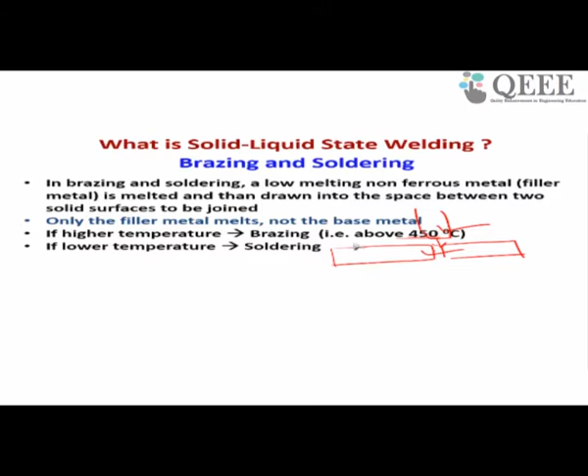So in solid liquid state welding, what happens? If you want to join two pieces together, you have to keep two base pieces together. Then you have to place a filler material near the two pieces to be joined. So here you have to place a filler material, and then you have to melt the filler material, and then it will move between this and make a joint.

So here base material, you are keeping as it is, you are not melting the base material, and you only have to melt the filler material, and after that it will go and deposit the weld. So you will get a joint. If the temperature is higher, it is called brazing, meaning if the processing temperature is above 450 degrees centigrade, it is brazing. If the processing temperature is below 450 degrees centigrade, it is soldering.

It means whatever filler materials you are going to use for brazing, it should have a melting point above 450 degrees centigrade, and solder filler material should have a melting point of less than 450 degrees centigrade. This is the only difference between brazing and soldering. Otherwise, the working principle of brazing and soldering are exactly the same.

As you know, soldering has wide applications. Soldering is used extensively in electronic assemblies, where the joints provide sufficient strength while allowing the various components to transmit electronic signals. So how does joining happen in brazing and soldering?

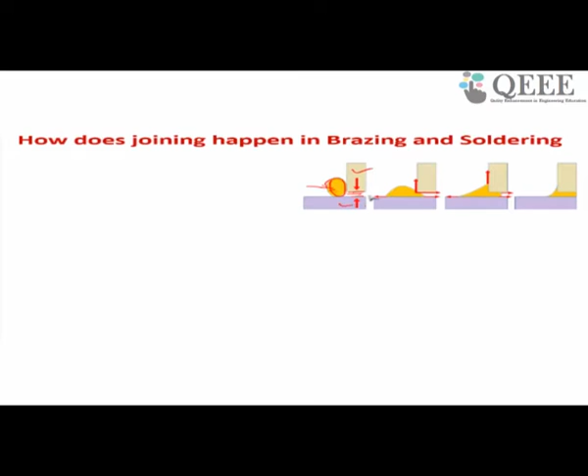So what are the conditions necessary for successful brazing and soldering? The first condition is you have to melt the filler material. You should have a provision to melt the filler material. This is the first condition.

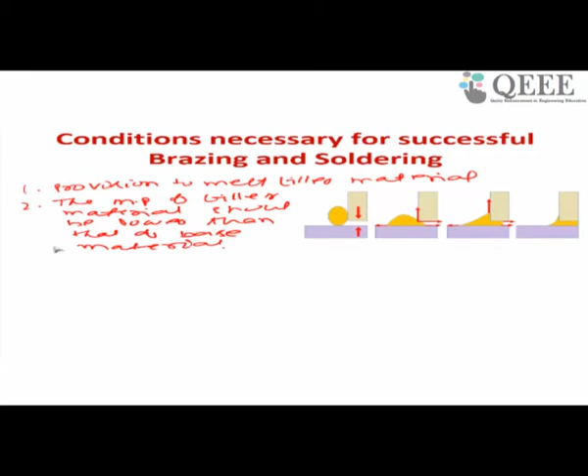Second condition is the melting point of filler material should be lower than that of base material. Then only the filler material will be melted and the base material will remain as is.

Without that, what will happen? So what are the conditions required? One is provision to melt the filler material. Then the melting point of filler material should be lower than the base material. If both conditions are there, then what else is required?

The filler material should wet the parent material. So filler material should wet the parent material. Then it should spread and make contact with the joint opening. So the filler material should spread, wet the parent material, and spread.

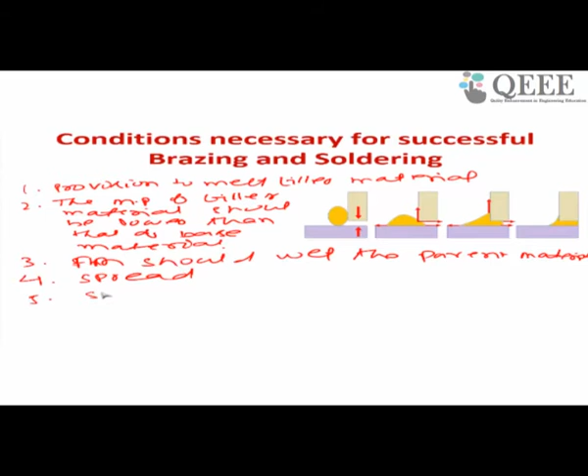Then you should have a provision for capillary action. So points 3, 4 and 5 are important. What is the basic requirement? The prime requirement is the filler material should wet the base material.

Suppose this one and this one you want to join, the filler material should wet, so it should have high wettability. Then point 4 says after wetting it should also spread continuously. When you place water on it, it spreads continuously, then only it will wet. However, when you place mercury on a solid surface, it will not wet completely.

So water has good wettability compared to mercury. So for capillary action, point 3 is satisfied - filler material should wet the parent material, and for that it should have high wettability. The next point is it should spread continuously and completely. For that, what is the necessary requirement? The contact angle should be as low as possible.

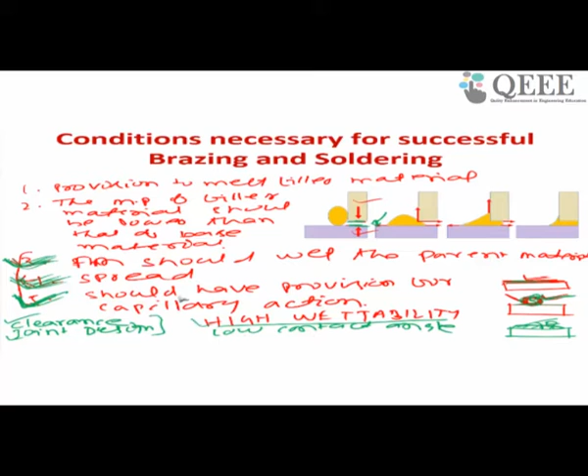So we discussed that to satisfy points 3 and 4, we should have high wettability - wettability is a parameter, wetting is a parameter, and contact angle is a parameter. So what is wetting and what is wetting angle or contact angle?

When you place a molten droplet - for example here, this is your solid piece, workpiece. Now this is your workpiece, so this is solid. Now if you place a droplet of filler material, so in my workpiece I am placing a droplet here.

When I want to enhance the capillary action, what do I have to do? I have to melt the filler material. I have to use this workpiece, then use filler material, and melt it. Then the filler material should wet the workpiece area.

So when I melt it, what may happen? The filler material may retain like this, or it may deposit like this, or it may completely flow like this. It depends upon the wettability of the filler material on the workpiece, against the workpiece.

Suppose this is the workpiece. If this is the workpiece, this is my surface free energy. If surface free energy is gamma s, this is my solid phase - the surface free energy of the solid phase workpiece.

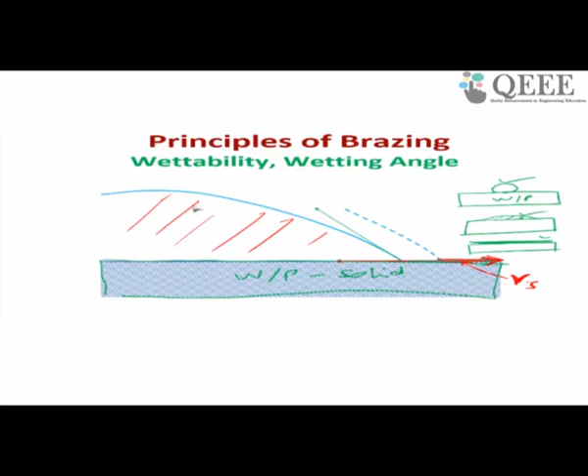Now this is the droplet, the filler material droplet. This is in liquid state. So the filler material is liquid.

So what is this energy? This energy will be the surface free energy of solid-liquid. Here my solid is the workpiece and liquid is the filler material. So this is the surface free energy interface between solid workpiece and liquid filler material.

Now what is this one? This one is the surface free energy between liquid and vapor. So liquid and vapor.

Then what is this angle? This angle is the contact angle. Theta equals the contact angle.

So when I place my molten filler material on the workpiece, if the filler material wets my workpiece with an angle of theta like this, let us say this is the condition - this is my angle theta. I have enlarged this view and shown it here. So this is theta, and then what will happen?

So for making equilibrium, what should I do? Gamma s should be equal to - surface energy for solid is equivalent to surface energy of liquid-vapor times cos theta plus surface energy of solid-liquid. So it means for equilibrium, to maintain equilibrium, surface free energy of solid should be equivalent to the summation of this product plus the surface energy of solid-liquid.

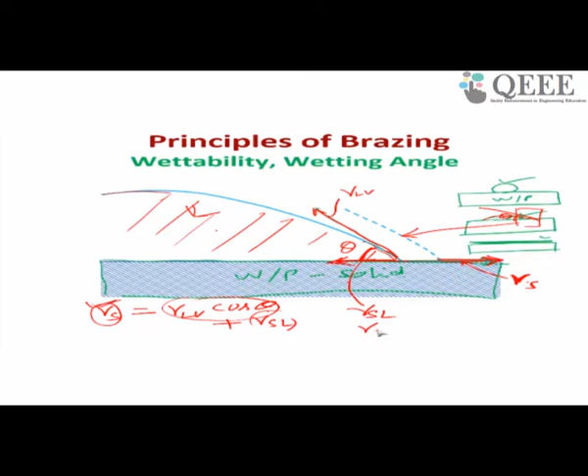What does it mean when complete wetting is possible? So finally we got: surface energy of solid equals surface energy of liquid-vapor times cos theta plus surface energy of solid-liquid, where theta equals the wetting angle.

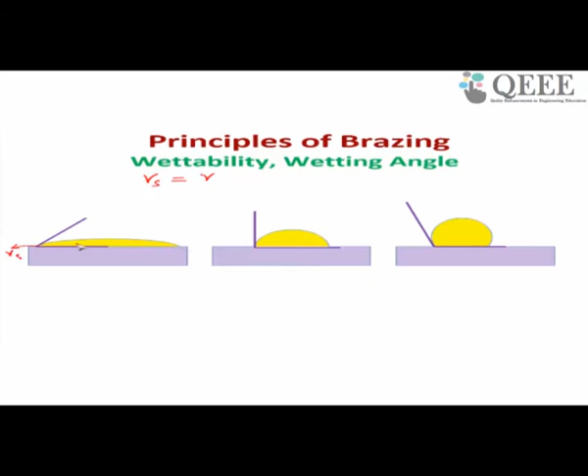So what is the condition here? We got that for equilibrium, gamma S is equivalent to gamma LV cos theta plus gamma SL. It means for equilibrium to happen, my surface energy for solid is equivalent to this.

Now, when is complete wetting possible? What is desirable is complete wetting, when theta equals 0. When theta equals 0, then it can completely wet.

So in this condition, when theta equals 0, gamma S equals gamma LV plus gamma SL. It means for complete wetting to happen, this surface free energy of solid should be equivalent to the summation of surface energy of liquid-vapor plus surface energy of solid-liquid.

So it indicates that this is a very important parameter while selecting materials. We have to select a filler material and workpiece material in such a way that the surface energy criteria are satisfied. What does this equation tell us?

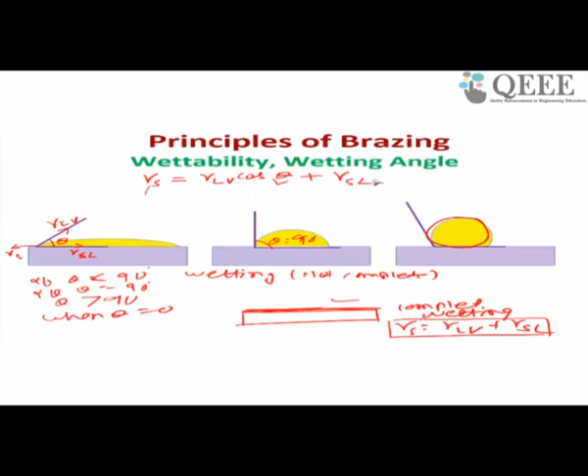So what is the difference between brazing and soldering? In brazing, joining happens because of capillary action and bonding action. That's why the strength of the brazed or soldered joint is higher than that of the filler material as well as the base material. So here we get higher joint strength than even the base material or the filler material.

So what is the difference between brazing and braze welding? In brazing, joining is happening because of both capillary action as well as bonding. However, in braze welding, joining is happening like a welding.

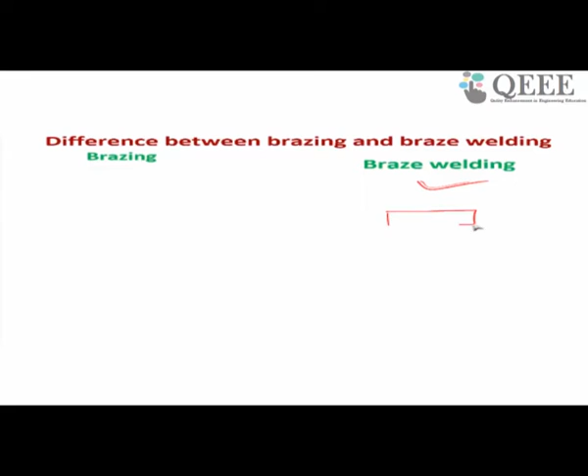So if you want to join two pieces here in brazing, you have to take a filler material, then melt the filler material. When you melt the filler material, it will be deposited here and you will get a joint. So this joint is happening because of capillary action plus normal bonding.

In braze welding, you will also be able to join, but the joining only happens because of welding — here the capillary action is not effective. That's why it is called braze welding. So the joint strength of brazing is higher than that of braze welding, because in braze welding capillary action is not effective, so the gap will be more.

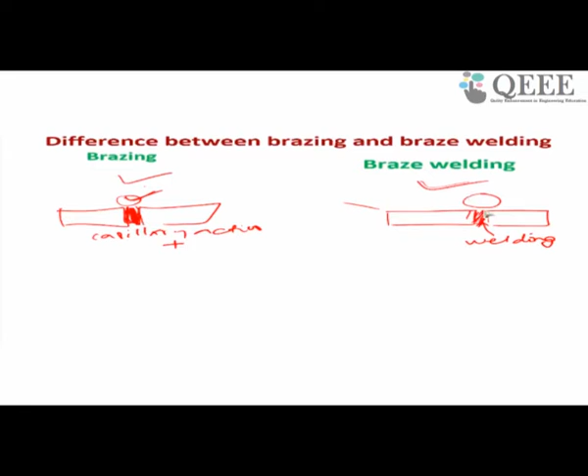Then how do brazing and soldering differ from conventional welding? In conventional welding, you have to select a filler material such that its composition is exactly similar to your base material, and the melting point...

Since you have to melt both, the melting point of the filler material and the base material is almost similar, because you are using similar composition in conventional welding. However, in brazing and soldering, the melting point of the braze alloy and solder alloy is very low compared to the base material. That is one difference.

The second difference: in conventional welding, meaning fusion welding, the welding happens because of melting and solidification of the base material. However, in brazing and soldering, the joining happens because of capillary action.

Since joining happens because of capillary action and the temperature is very low — in brazing the temperature is around 450 degrees centigrade or slightly higher, and in soldering the processing temperature should be less than 450 degrees centigrade — the joining process can happen very quickly. So brazing and soldering are quick and economic processes, and a wide range of metallic and non-metallic materials, including dissimilar materials, can be joined using brazing and soldering.

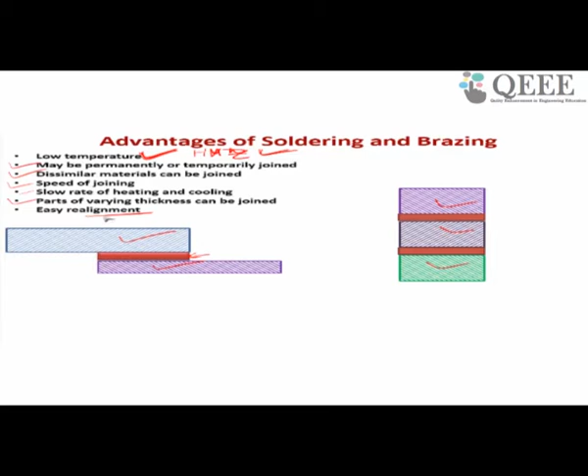Anything is possible. You can easily realign the parts - you just heat the piece above the melting point of the filler material to separate, then rejoin. That is called realignment, and it is also possible. So how do we enhance the joint strength in a braze joint or solder joint?

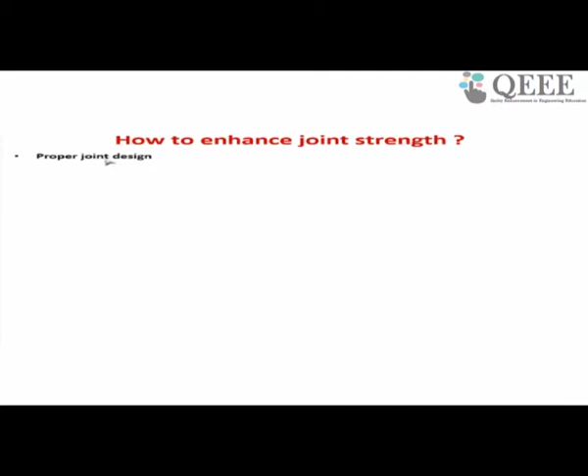First is by creating the clearance, because our objective is to create capillary action - joining happens because of capillary action. So the first important point is the joint design, and the second is the condition to create proper capillary action. The joint design and capillary action are related to each other. To maintain capillary action, you have to develop proper clearance.

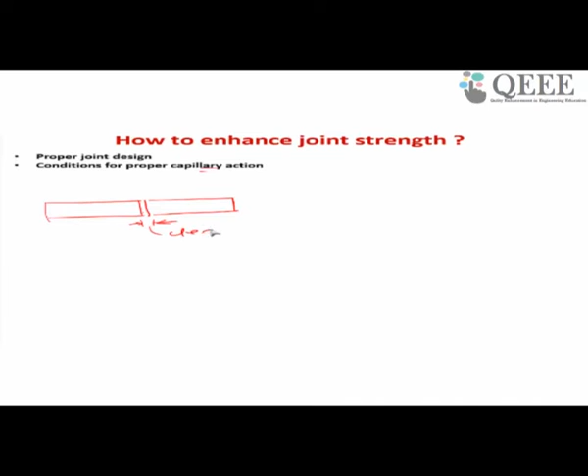You have to create the clearance in such a way that if you draw clearance versus joint strength, what will happen? Up to some level it will enhance, then it will deteriorate. As you reduce the clearance angle, the joint strength increases - but if the clearance is very low, it cannot create capillary action. So initially the joint strength gradually increases, and at a critical gap it gives the highest strength, then gradually decreases.

That's why in brazing your optimal region is somewhere here, where you get high strength. In fusion welding, your region is different, giving joining only because of welding. However, in brazing, you have to provide the clearance in such a way that it gives high strength, because of the capillary action.

Next is to maintain the clearance. The clearance is one part, and the joint area or surface region is another - if you want to apply tensile stress on the joint, the joint strength depends upon the capillary action bonding as well as the joint area. So you have to provide proper joint strength by increasing the joint area like this.

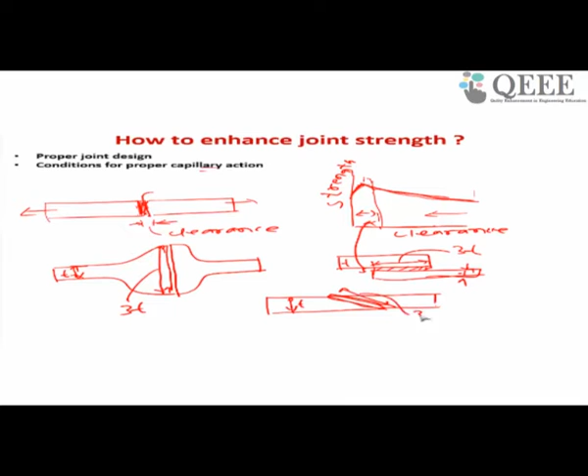So now you have to maintain, this is joint design. So this is your, if this is T, generally it should be greater than 3T. So the joint area, in the joint area the thickness should be greater than 3T, then you will get better joint strength.

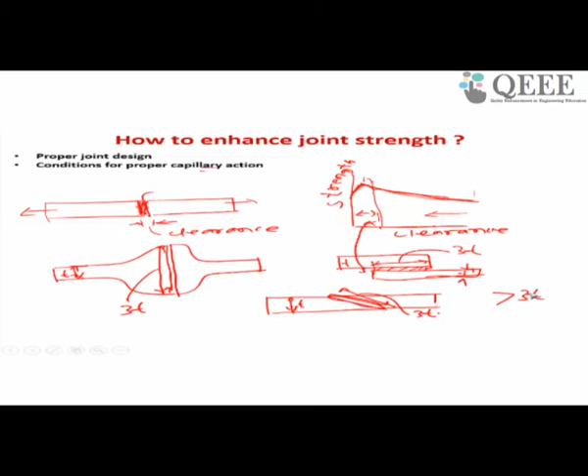So in brazing we use flux also. What is the function of flux in case of conventional welding process? As I said, the flux reacts with the oxides and whenever it reacts it forms slag, and since its density is low it floats on the top of the weld pool and it deposits on the top of the weld pool. So that is called a slag. So you can remove the slag before giving your next welding pass.

Similarly, here also flux is very important, because here what you do, the two pieces to be joined. If you want to join two pieces like this, then at this interface there should not be any oxide layer, then it may hinder the capillary action. So you need to remove the oxide layer. For that the flux is required.

For brazing you have to use filler material as well as flux. The objective of the flux is that it should dissolve the oxides that form as a result of heating the part, and it should prevent the formation of new oxide during heating, and the flux should also aid the capillary action of the molten metal. So here the flux also helps in aiding the capillary action.

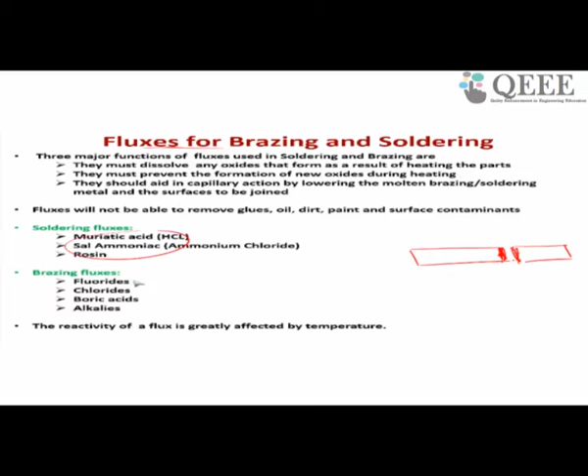So they use flux like, for example, for soldering, these are the different flux. For brazing they use different kinds of flux as per the need.

Then the filler material. As we know, for soldering the melting point of the filler material should be less than 450 degrees centigrade. Similarly in brazing, the process is happening at above 450 degrees centigrade. So the melting point of the filler material should be greater than 450 degrees centigrade, and the process will happen above 450 degrees centigrade here. So your filler material, for example, there are different soldering filler alloys used.

For example, tin-lead based filler material is used for copper and copper alloys, mild steels, galvanized steels, etc. And tin-antimony alloys are used for copper and copper alloys, mild steels, like that. Similarly, for brazing also different alloys are used - this is brazing alloy.

There are different brazing alloys also. For example, aluminum silicon alloys are used for aluminum based materials. Copper zinc filler materials are used for carbon steels, for joining carbon steels, cast irons, copper and copper alloys. Silver based brazing alloys are used for joining alloy steels, stainless steels, mild steel, nickel alloys and copper alloys, etc.

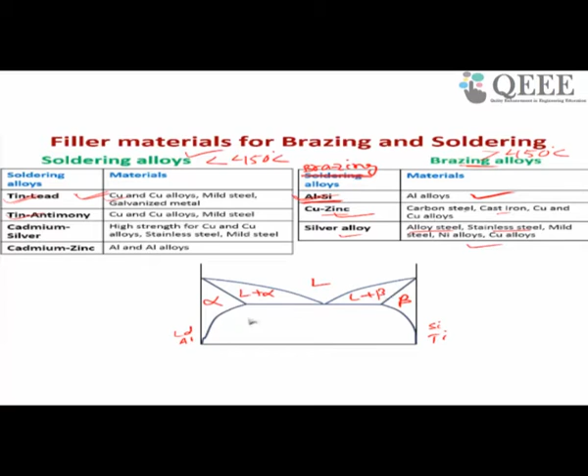What will happen in this case? It will have a paste zone. This is the liquid, this is solid - one solid phase, this is second solid phase, this is liquid plus solid phase, this is liquid plus solid phase, and here you are getting alpha plus beta, two solid phases, and your braze or solder alloy should lie in this zone. This is called a paste zone. So your alloy composition should be somewhere in this zone, where it is liquid plus solid. So in brazing and soldering, the alloy should fall in this zone.

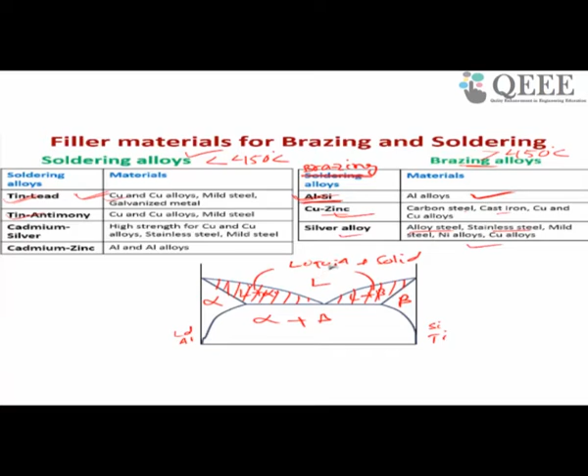Now, what are the welding, soldering and brazing methods? So for soldering, one approach is torch soldering or brazing. What you have to do here? You have to take a torch. So the two plates to be joined will be kept like this.

So you have to place the solder or braze alloy on top of it. This is the workpiece, and the braze or solder alloy is the filler. Then you have to use a torch to melt it. So when it melts, it will be deposited here, because joining happens due to capillary action as well as wetting.

So what are the advantages? Since you use a simple torch to join, you can take this torch anywhere and join in any location. That's why it is portable and versatile, and speed is very fast.

However, you cannot control the heat input here, so it may overheat this region also, which is unwanted. So overheating is possible, high skill is required, and it is a fire hazard.

So this is about torch soldering and brazing. Next one is furnace soldering and brazing. In furnace soldering and brazing, what happens?

Initially, there will be a continuous furnace. You can see this is the bed of the furnace, and there is a conveyor system which moves this bed continuously in this direction, moving it to this roller. So this part is the furnace.

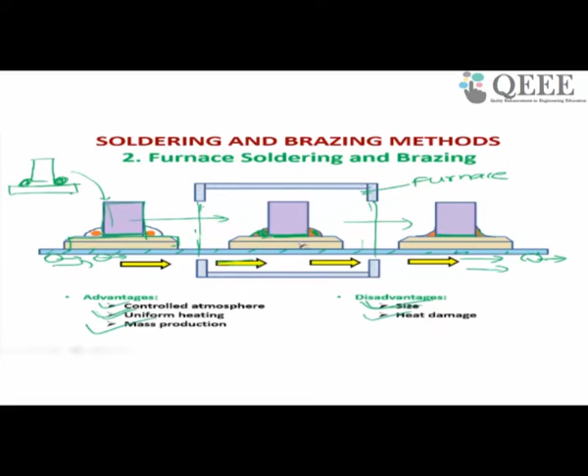Since the joining is happening inside a furnace, there is a size restriction. Depending upon the capacity of the furnace, you can join your workpiece according to that size, and the whole workpiece is heated. So you want to melt this one, but the whole workpiece is heated, so it may cause some heat damage to the workpiece.

These are the demerits. Next condition is dip soldering and brazing. What happens in dip soldering and brazing is, you have to take your workpieces to be joined. Suppose you want to join two pieces like this, place them like this. Then you have to give some protective layer, because you want to only heat this region. Give some protective coating here, and give some protective coating here.

Now here at this region you place your filler material. As I said, filler material will be in paste region, as we discussed in one of the slides. So looking at the phase diagram, the filler material falls in this zone, so it is in semi-paste region, and you have to paste it here.

Then when you supply the whole thing, what do you have to do? If this is the filler material, then you have to use a flux, a molten flux. So the bath should be flux, then it will be called a molten flux bath. Then you have to place the whole thing inside a molten salt bath.

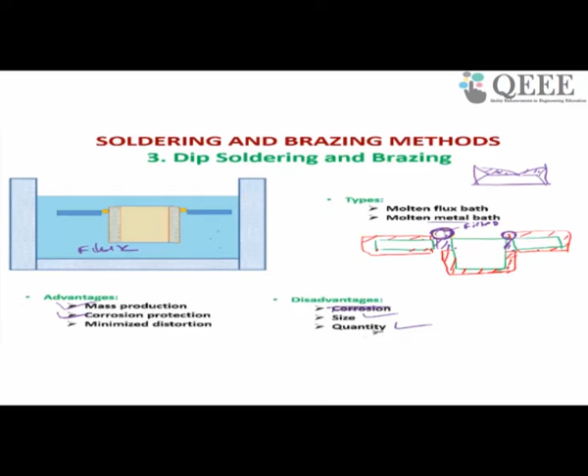Since it is a dipping process, it is suited for mass production. You can continuously do it, so you can make it mass production, and depending upon the requirement, you can provide some corrosive-preventing material inside this, so that it will prevent corrosion and minimize distortion. Disadvantages are that size is limited, and at a time you can do only one, so quantity production is also less. Next one is...

Resistance brazing or soldering. So the next method is... this is not soldering and brazing itself, this method is resistance heating. By resistance heating you can do soldering and brazing. So what is resistance heating?

We have already discussed this while discussing fusion welding. In fusion welding, we discussed that we have to use an electrode, then the two pieces to be joined will be kept like this. Then you have to place one electrode touching this. Then you have to take two electrodes touching it. This is the conventional welding. So this is the workpiece, and this was my electrode.

Then we were supplying current at high current, and as a result we were getting I-square-R-T joule heating. We were supplying high current, and because of the high current and resistance, heating was happening at this interface, and because of melting and solidification, we were getting a joint at this interface. There, current was high and time was very low in a conventional resistance heating process.

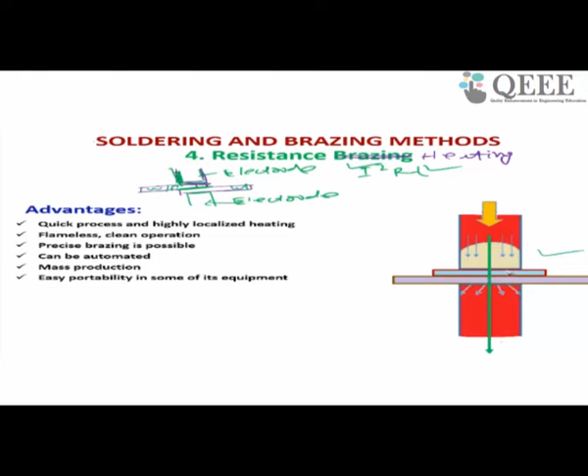How is the resistance welding used for soldering and brazing different from the conventional resistance process? We can see from this figure. In case of brazing and soldering, what happens? We have to place our workpiece here, like in conventional resistance welding. This is our workpiece 1, this is another workpiece, and you have to provide a gap.

So in the gap here we have to provide filler material. Now using the same principle, apply force, minor force, and apply current. Because of the current, it will heat the workpiece. Since this workpiece is connected to the filler material, and since the melting point of the filler material is lesser than the melting point of the workpiece, the filler material will melt fast. As a result, it will melt and deposit.

It will be deposited here, and you will get a capillary action. So before that, you will place the filler material something like this. It will move inside through capillary action, and as a result, you will get a joint. That's why it is a quick process. It is a flameless process, a clean process, so precise brazing is possible.

It can be automated also, as any resistance welding process can be automated, as we saw while discussing resistance welding. We can make mass production, and it is portable equipment, so it is an easy and good process. So this is about brazing and soldering. Does anybody have any doubt on brazing and soldering?

With this, we have finished the joining processes. We discussed liquid state welding processes. In liquid state welding, we discussed all kinds of fusion welding processes. For example, we discussed arc welding, resistance welding, gas welding, then electron beam welding and laser beam welding. These are all coming under liquid state process.

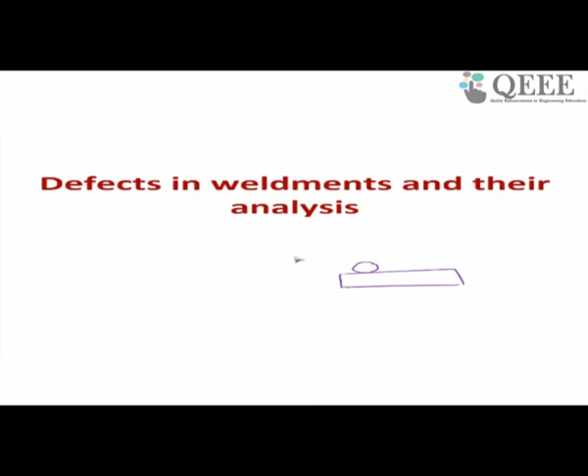Someone asked, is brazing used on tool tips? Yes, we use brazing on tool tips.

Is there any effect of machining temperature on the joint? It doesn't affect it, because the brazing has already been done before you use that cutting tool for machining, and the brazing temperature is above 450 degrees centigrade. Depending upon your requirement, you select a braze alloy. For a cutting tool, the brazing temperature will be very high, higher than the temperature induced during machining, so nothing will happen. Only if the temperature exceeds the melting point of the filler material used for brazing will the brazed joint melt.

Now we will discuss defects in weldments and their analysis. What is a good weld? We discussed many welding processes, and by using any of them we get a weld. A weld can be called a good weld, a good joint, if we have complete fusion to the base material, a good weld profile, no defects like porosity or inclusion, and no cracks, with strength equivalent to the base material.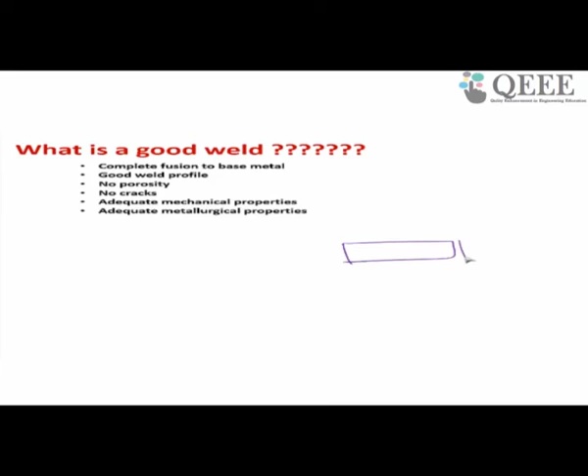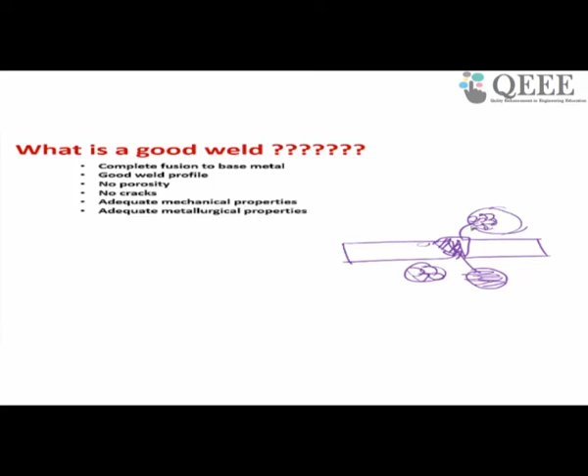For example, if you want to join these two pieces together, the joining happens in this region. If you look at this region, the grain size will be of a certain size. In the base material you have this kind of grain size, but in the weld zone you may have elongated grains, like dendrites, or in some joining processes you get even finer grains. In solid state joining, you get very small grains, smaller than the base material. In fusion welding, the grains will be bigger than the base material.

This also affects the strength properties. That's why in any fusion welding process, the weakest region may be either the weld region or the heat affected zone. This is your heat affected zone.

We want adequate mechanical properties, which is desirable. Joint strength around 100% is beneficial, and it should also have adequate metallurgical properties. If you have all these parameters, then you can say that a joint is a good joint.

But no process is perfect. So while taking all precautions, there may still be some defects during welding. There are different kinds of possible defects that form during welding. One category is surface defects, second is internal defects, and third is structural defects.

Under the surface defects category, some of the defects are inadequate joint penetration, incomplete fusion, arc strikes, overlap, undercut, cracks, and underfill. All of these come under surface defects, where the defects are visible.

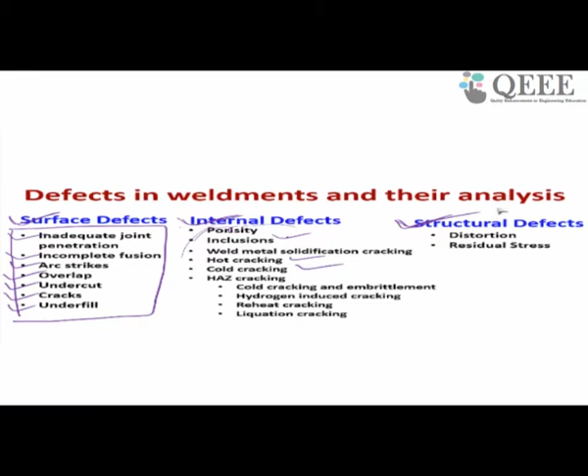Now we will discuss the defects one by one. The first is a welding process related defect: incomplete fusion. If your fusion is incomplete — suppose you want to join two pieces, a thick material, in multiple passes — you have to provide proper joint preparation before that.

You want to join one piece like this, deposit it, then deposit the second layer, then the third layer. By multiple passes you have to join, because the thickness is more and the joint gap is more, so you have to do multi-pass welding. After each pass, if it somehow does not fuse at some region, you have to join one pass, and then you will get a slag layer on top of it.

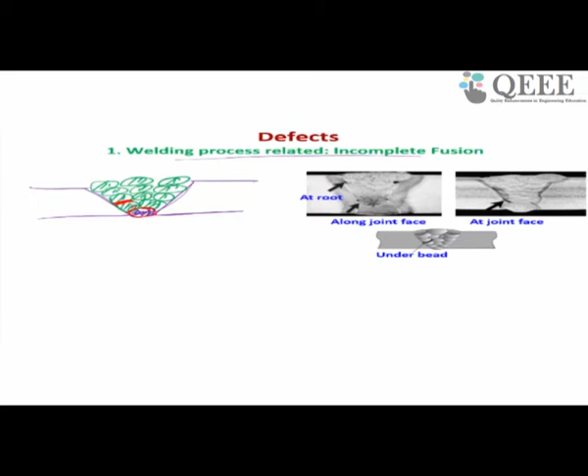You have to remove that slag layer, then deposit the second pass. Again you will have a slag layer on top, which you must remove before depositing the third pass. If by chance some slag remains in the material, fusion will not happen in that region. Or if the heat input or welding process is not perfect, fusion may not happen in some region. This is called incomplete fusion.

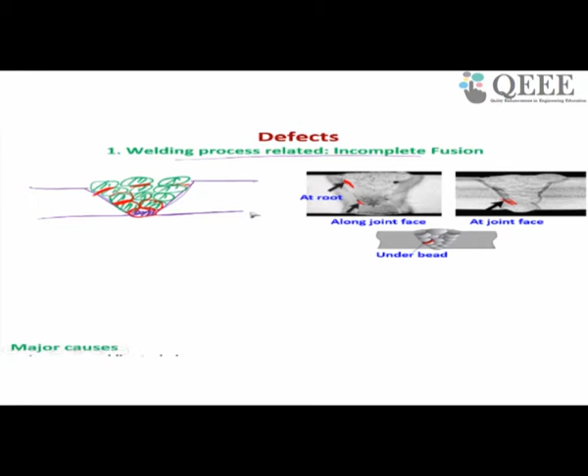This can happen at the face, inside the bead, or at the root — incomplete fusion. It may happen because of lack of breakup of the oxide layer. If an oxide layer is present, you have to remove it properly; if some oxide layer remains, fusion will not happen in that region. So because of all these process issues, you may get this kind of inappropriate fusion.

The next one is inadequate joint penetration. This happens when you want to join two pieces like this.

What is your objective? Your objective is to get what is called a proper weld. If everything is perfect, heat input is perfect, welding speed is perfect, feed is perfect, and the electrode angle is perfect, then you will get this kind of weld joint.

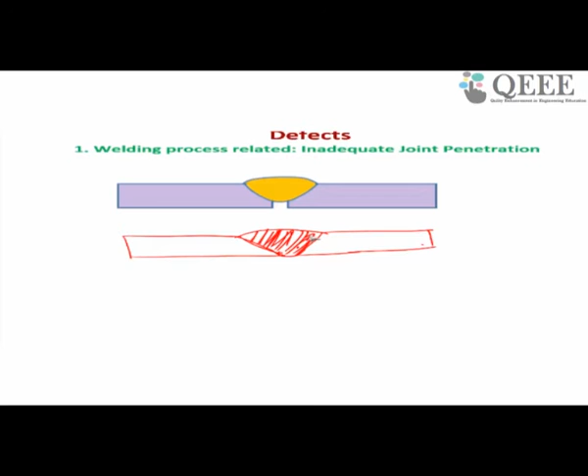But because of improper heat input, the material will not melt and join properly, and it will have this gap. This is called inadequate joint penetration. It happens because of improper welding technique, insufficient welding current, improper joint design, and so on. So you have to calculate and do proper joint design before welding.

What will happen if you have this kind of defect? It may act as a stress riser because it's a defect, and during cyclic loading or some loading environment, a crack may initiate at this point and propagate.

Next one is undercut or underfill. If you want to join two pieces like this, this is a perfect joint. Similarly, for lap welding and butt welding, if you join two pieces properly, this is a perfect joint.

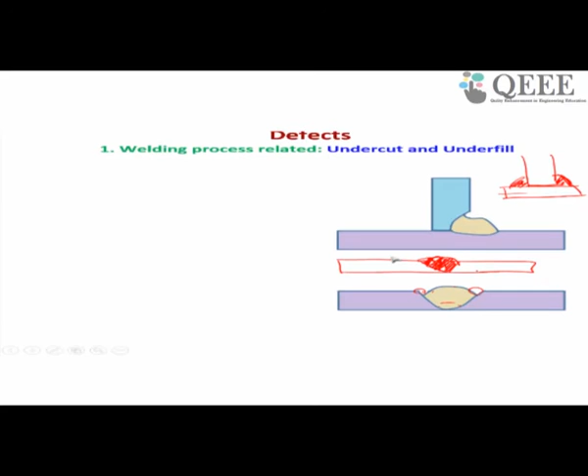But with high electric current and fast processing speed, at the interface you will have this kind of defect. It will not be able to melt and solidify at the corner region, which may require multiple passes, with this being the last pass. Because of the high speed of arc travel, there won't be sufficient time for melting and solidification in this zone.

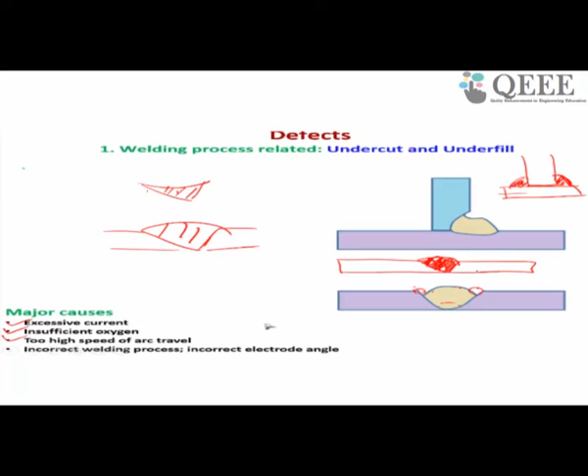As a result, you get undercut or underfill. Underfill means you want this kind of joint, but instead you get this kind of joint because of parameters like excessive current and insufficient oxygen. If oxygen is insufficient, it will not be able to melt the material properly, leading to this defect. Other causes include too fast arc speed and inappropriate welding design and processing parameters.

Similarly, you may also get overlap defects. Suppose you want to join two pieces like this, as we discussed, this is your ideal solution. But if there is some oxide layer, and you are doing multiple passes—one pass, two pass, three pass—

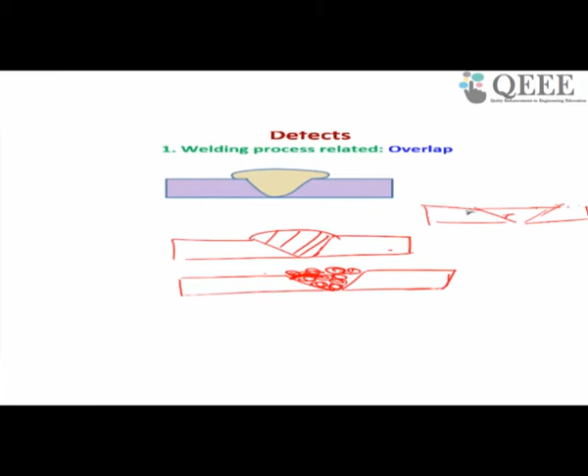if there is an oxide layer in between, it will not be able to fuse this region. You would have already designed your welding condition and calculated how much electrode is required for joining this volume of material. But because of this oxide layer at the interface, it will not join in this region, and instead it will overlap the top region like this.

If you have this kind of overlapping, the heat input will affect the heat affected zone below, which is the weakest region of your weld material, and this will again hamper the properties. It happens because of tightly adhering oxides, as I said, and incorrect manipulation of electrodes.

Next is internal defects. Until now we discussed surface defects which are visible; now we will discuss internal defects. In fusion welding processes, we use flux. The function of flux is that it reacts with the oxide layer and forms slag.

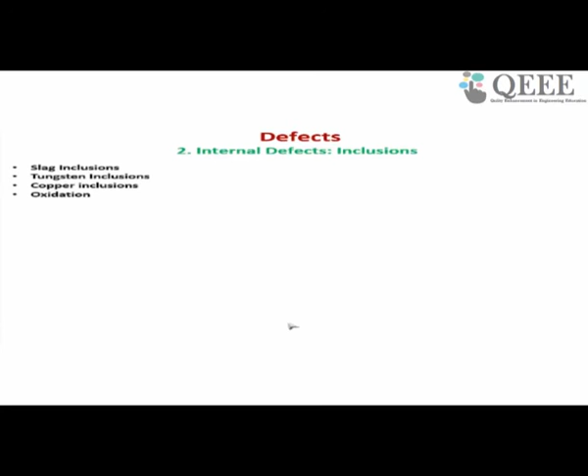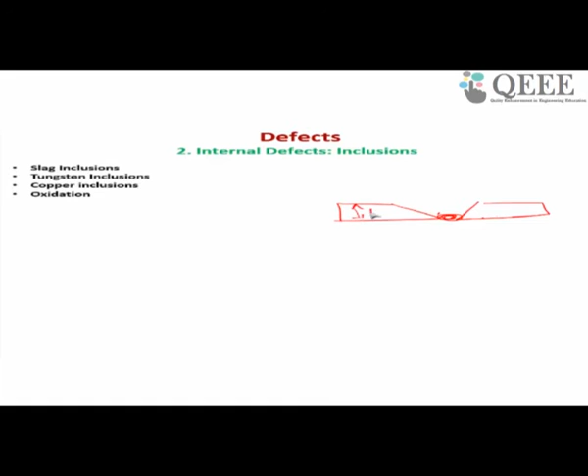When you do multi-pass welding, suppose you have deposited one layer here and you want to join like this—this is another layer, and this is another layer. Suppose you want to join two thick plates; you cannot do it by a single pass, you have to do multiple passes. Suppose you have done the first pass.

So by first pass you have done. Then what you have to do? You have to remove the oxide layer, slag layer on top of it. Then you have to remove that slag layer. Then you deposit after removing. You have to do the second pass. Then again you have to remove this slag layer, then do the third pass, like that.

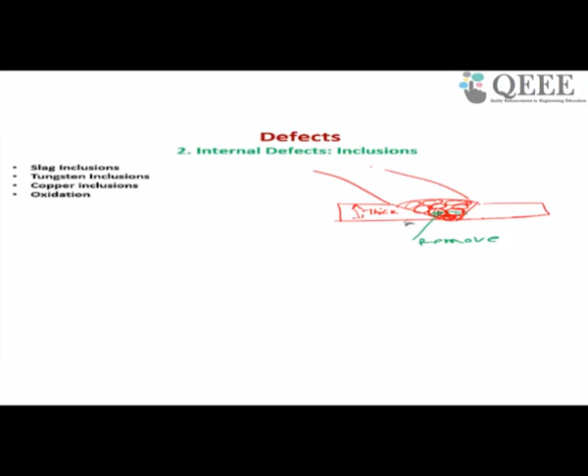So while removing, you have to do it manually. There is a high chance that some slag may still retain, and if it is retained, it will not be visible to the naked eye. For that you have to go for some NDT technique to visualize it, because these are internal defects. Because of this, in the weld pool you get slag particles.

What is tungsten and copper inclusion? While discussing fusion welding processes, we said there are two types of arc welding processes: one is non-consumable type, and the second one is consumable arc welding process.

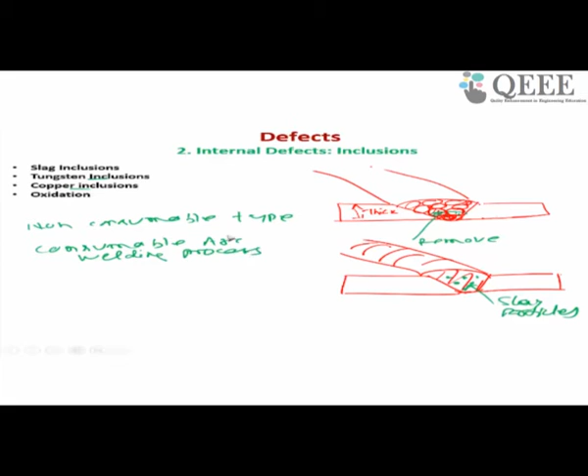In non-consumable type, the filler material is separate. This is your filler material, and this is your workpiece, here you want to join. Here you only have to provide the connection, so you have to use filler material separately in non-consumable type.

And this is your electrode, and this is your base material, workpiece. However, in case of consumable type welding process, you have to use the electrode, and there is no need to use filler.

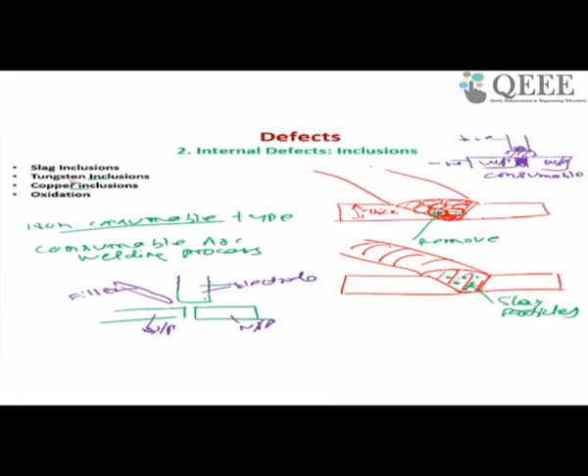So we will continue again. We discussed about inclusion type of defect, and we discussed about the joining technique using consumable type arc welding.

What is happening here? You control the polarity, one is positive, the other is negative. As per your wish, you change the polarity to get the heat input on both sides. In consumable type, the melting happens on the electrode and the electrode deposits into the workpiece region. So the workpiece also melts, the filler material also melts, and you get a weld joint here.

What happens in case of non-consumable type arc welding? Here you have to use an electrode in such a way that it should not melt. You don't want to melt the electrode, you want to melt the filler, so you need additional filler material.

Then you have to again supply the polarity - positive to one, negative to the other, or vice versa. But here you want low heat input at the electrode tip and high heat input at the workpiece tip, because you don't want to melt the electrode. So the electrode only acts to supply and provide the arc.

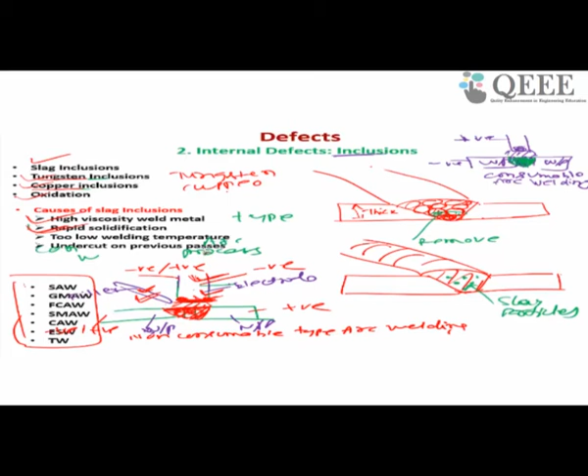Similarly, undercut - too low undercut. If there is undercut, the slag may be entrapped and placed inside the undercut, so it may not be able to come out to the top surface. As a result you will get slag inclusion. So in almost all fusion welding processes, you get this kind of slag inclusion.

So this one we discussed. Next one is porosity, which is also a type of internal defect. What is porosity? We do welding in atmospheric condition, so for example in atmosphere we have different gases like nitrogen, hydrogen, oxygen and all. These atmospheric gases have very high liquid solubility and very low solid solubility.

You can see from this diagram that at high temperature the solubility limit is very high, however at low temperature the solubility limit is very low. So what happens because of this? When you weld in atmospheric condition, we have hydrogen, oxygen, nitrogen, and different gases present.

These gases have high liquid solubility at high temperature. For example, in molten state, which is a high temperature state, these gases have high solubility. However, when the molten metal solidifies, these gases have very low solubility. As a result, the gases try to escape, and you get porosity. This is the origin of porosity in welding, and this kind of porosity happens in any kind of welding and casting processes.

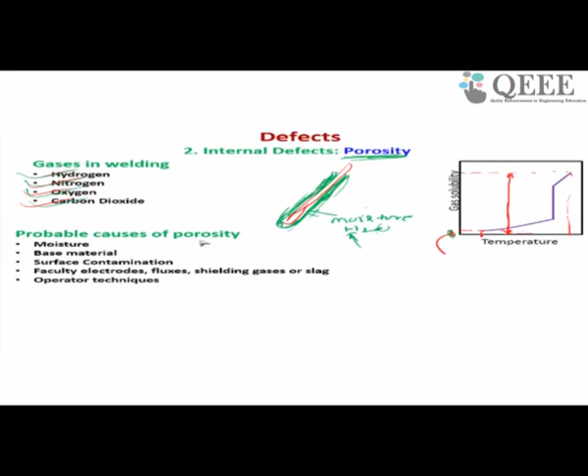Next is weld cracking and failure. What happens here? These are metallurgical related defects. So far whatever we discussed, whether inadequate joining, fusion, porosity formation, or inclusion formation, all these are process related defects, welding process related defects, caused by improper processing conditions. Now we'll discuss some defects related to metallurgy.

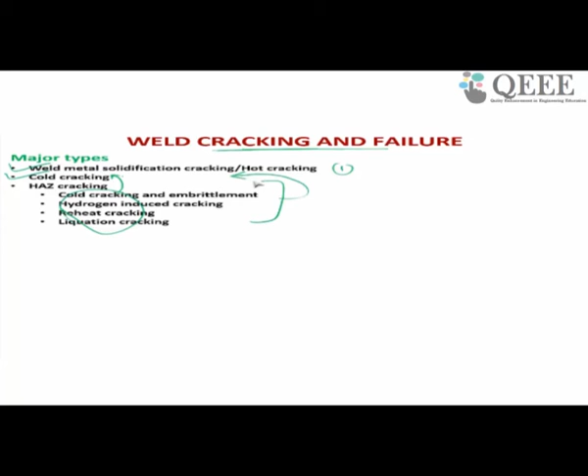So two major types of defects are hot cracking and cold cracking. One is hot cracking, also called weld metal solidification cracking. The second is cold cracking, and under cold cracking, several process types are included. So first, under weld cracking, we discuss hot cracking or weld metal solidification cracking.

So what is happening during welding solidification? Suppose we want to join two pieces like this. What will happen? Suppose this is the ideal condition.

Okay, so this is the weld. So what will happen when you start welding from one end to the other end? Suppose we are welding, we are in the entrance zone and welding needs to happen. We did welding up to this region, and we need to go ahead, welding has to be continued. What will happen? The moment we do welding, what happens at the interface? At the interface, now this is the weld pool, right?

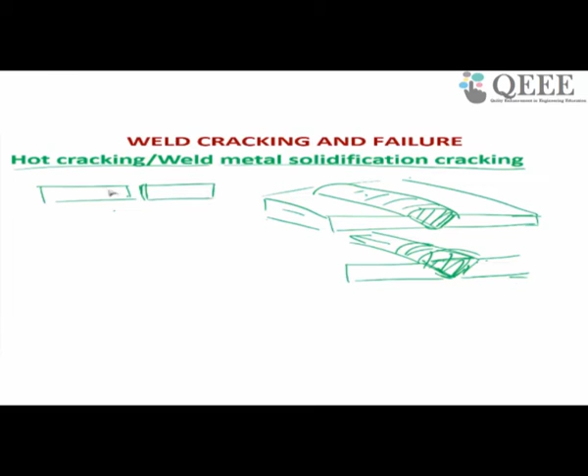We want to join the precursor. So what happens when you weld? This region melts and you get molten material. During fusion welding, you melt the interface region. So this is molten. Then what will happen? How will it solidify? If I take the different steps in welding, this is step 1, this is step 2, this is step 3. So what happens initially when you melt the metal in this region? You will have liquid, complete liquid.

Now what will happen? Now after melting, when you allow it to solidify, what will happen at the interface? Solid crystals will form. During solidification, at the interface and everywhere, solid crystals will form. So you will get solid crystals at different regions, and in other areas, these are the solid crystals, and other regions you will have molten metal. So this is molten metal, liquid.

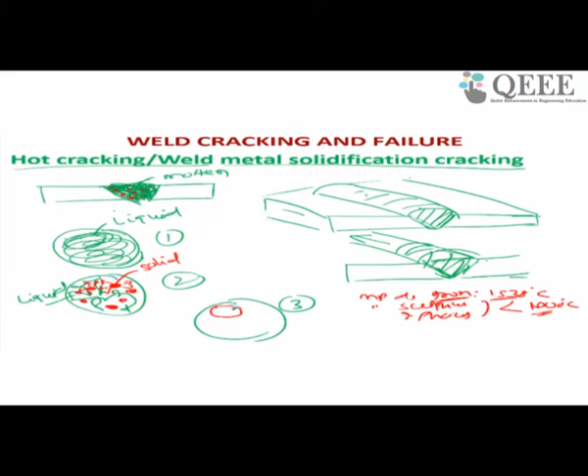And in the remaining area you will still have liquid. This liquid, when it comes near the melting point of sulfur and phosphorus, then only sulfur and phosphorus will melt and solidify. As long as the temperature is higher than the melting point of sulfur and phosphorus, only the iron solid crystals will form, and sulfur and phosphorus will still be in liquid state. So it will push sulfur and phosphorus away.

What will happen afterwards, at the end? You will have complete solidification. After some time, complete solidification will happen. When complete solidification happens, these grains will grow and meet.

When these grains grow, for example, the melting point of sulfur is only 115 degree centigrade. The melting point of phosphorus is only 44 degree centigrade. Then what will happen? It will try to solidify, and at the interface you will have a liquid layer.

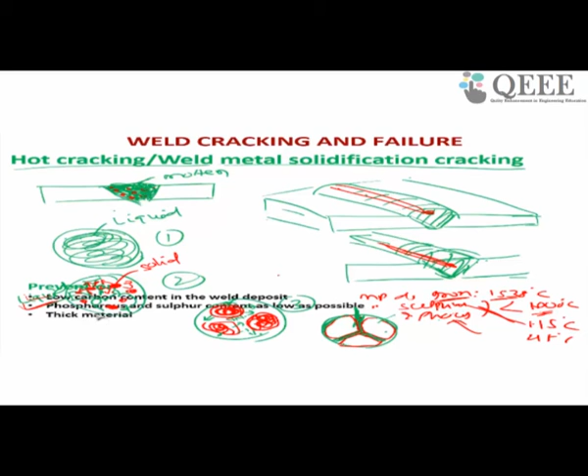So, to prevent solidification cracking, you should avoid phosphorus and sulfur in your material, avoid carbon in your material, and avoid thick material. Then you will not get this kind of solidification cracking defect.

Next is heat affected zone cracking. What is heat affected zone cracking? Again, this is a metallurgical defect. Heat affected zone cracking is a cold cracking, also called cold cracking.

Generally, this kind of defect happens either inside the material, as internal defects, or it may happen at the heat affected zone. Mostly it is affected in the heat affected zone, that's why it is called heat affected zone cracking or cold cracking.

Why does it happen? It happens after a long time. So when you do welding, it may happen after 1 week, 1 month, or 1 year after completion of welding. Why does it happen? It happens because of hydrogen, also called hydrogen embrittlement.

As we already discussed from the phase diagram, hydrogen has very high solubility at high temperature but very low solubility at low temperature. As a result, during the melting step of the welding process, hydrogen will be entrapped inside the weld pool.

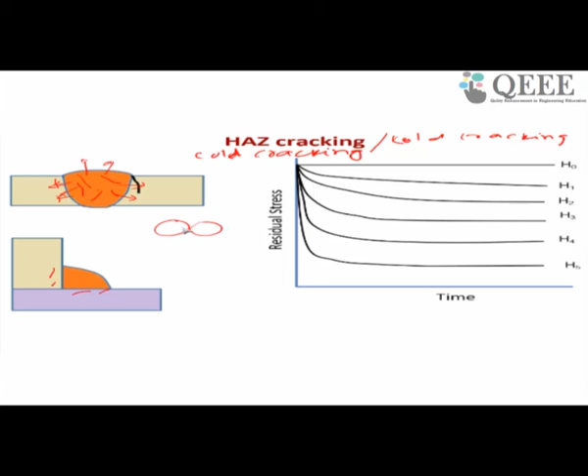Since hydrogen is an interstitial atom, it may be entrapped between two atoms, fitting inside the regular atomic structure. This will create a stress field around it.

During solidification, hydrogen comes out and gets entrapped at this zone, mainly nearest to the weld metal zone, which is called the heat affected zone. Hydrogen will cause a stress field around it. Now, if a material has some residual stress, this residual stress will act as a driving force for crack initiation.

So it will form a crack after a long time because of the presence of residual stress, or if it gets some driving force, it will cause cracks, and the crack will form and propagate near the heat affected zone region. That's why it is called heat affected zone cracking. You can see from this figure.

If a material has H0, meaning hydrogen level, if you have 0 level of hydrogen, H0 means no hydrogen content is available.

H5 means maximum hydrogen content is available. Suppose in a material you have 0%, 1%, 2%, 3%, 4% and 5% of hydrogen like this. H0 means 0%, H1 means 1%, like this.

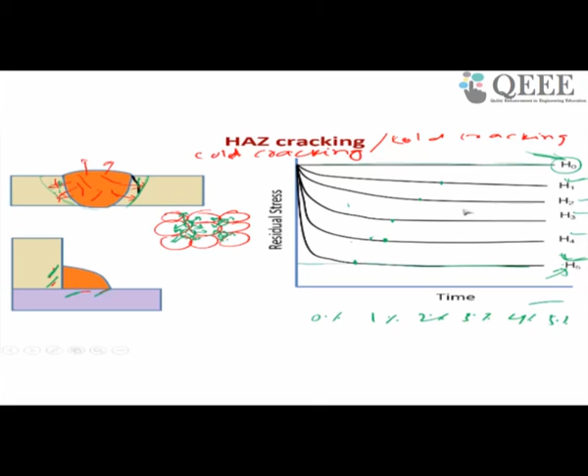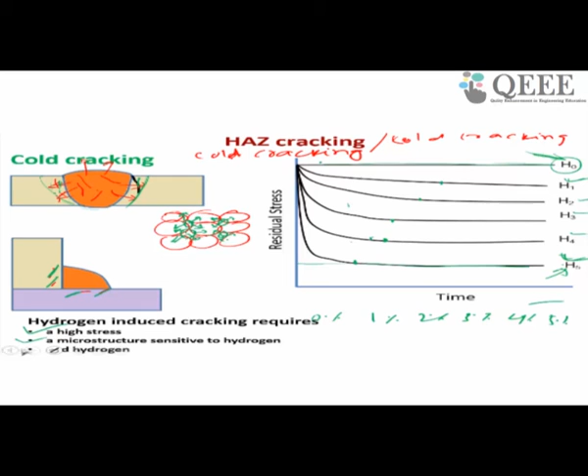So with the presence of hydrogen as well as residual stress, heat affected cold cracking occurs. Hydrogen induced cracking requires high residual stress, high level of stress, and microstructure sensitive to hydrogen. With the presence of all three, this crack develops. This is called cold cracking.

Some cases, another type of defect is called lamination and delamination. In some cases, when you have a base material - for example, a laminar type base material - you joined different layers, and you have a laminar type base material, or you rolled a base material. Inside the base material, we have some inclusion or already some defects are there.

With the presence of that defect or inclusion or some second phase particles, when you try to join two pieces, wherever these inclusions will be, from that point onwards the crack will initiate and it will try to propagate. This is called delamination type of defect.

So next type of defect is our structural defect - residual stress and distortion. That is distortion type of defect. In order to understand distortion type of defect, you need to understand residual stress. That's why even though we have distortion as a defect, we need to understand residual stress before understanding the distortion. What is residual stress?

If you have 3 rods, let us take 3 rods - rod 1, rod 2, rod 3. Take 3 rods. Then connect 2 rods like this by 2 rigid supports again. Then you only heat the middle rod. Heat.

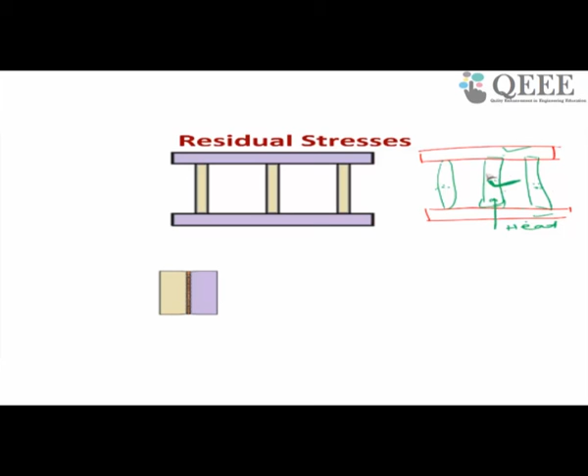I will repeat again. There are 3 rods. We connected 3 rods to 2 rigid supports. Then we want to heat the middle rod only. When you heat the middle rod, the middle rod will try to expand, but these 2 rods will not allow the middle rod to expand. As a result, you will get compressive stress in the center.

And here you will get tensile stress. Now you cool it. Suppose you have heated this up just below the melting point of your material, then you want to cool. During cooling, the middle rod will try to contract, and the side rods will not allow it to contract. As a result, after cooling, your middle rod will get tensile stress.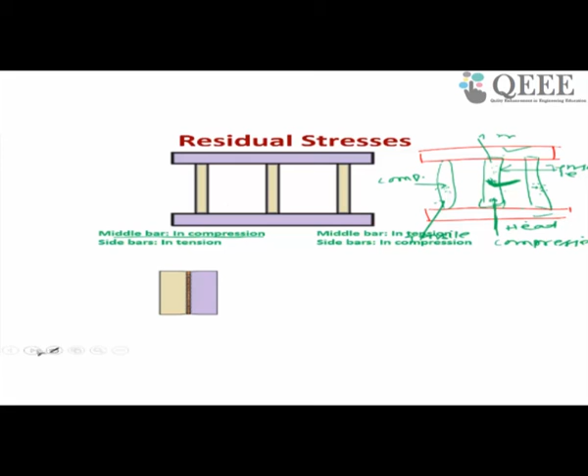And the side rod will get compressive stress. It means, before hitting, the middle bar will be in compression and the side bar in tension. After hitting, the middle bar is in tension and the side bar is in compression.

The same phenomena is happening in welding. When you weld 2 plates, plate 1, plate 2, when you heat, the joining area will try to expand, and this area will try to support that expansion. As a result, compressive stress will be developed at this weld zone, and a tensile stress field will be developed in the side zone.

However, when you cool after welding, this zone will cool. During cooling, it will try to contract. So a tensile stress field will be generated in the weld pool, and this tensile stress will be resisted by the side base material - a compressive stress field will be developed in the base material. As a result, in welding, suppose this is your axis, you will get something like this. Suppose I will do it on a bigger scale.

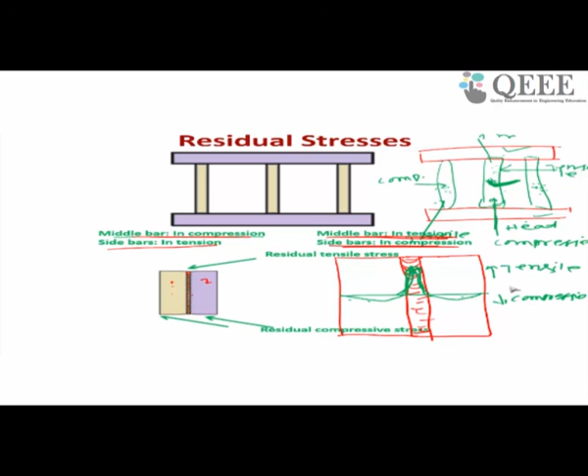Similarly, in casting also you get a different process. So you can do a case study. You take all the pieces, these are the different joints, and try to develop the kind of residual stress in this process.

So what is distortion? Why are residual stresses developed during welding? Residual stresses are developed because you are not allowing the distortion to happen, the axial movement to happen. That's why you are getting residual stress development. If you allow that movement to happen, that is called distortion. So that's why residual stress and distortion are related.

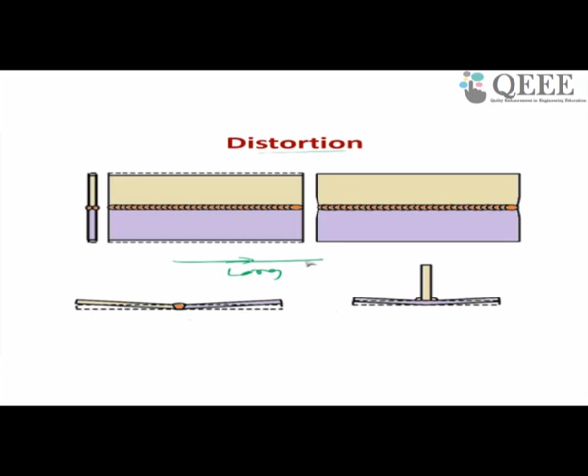So what is distortion? Distortion may be - this is transverse distortion, and this is longitudinal - this axis is longitudinal, and this side is transverse.

So in welding you can see the distortion may happen through the transverse direction, so it has contracted like this, or it may also happen in the longitudinal direction. Initially it was the total length, the initial length. Because of the residual stress, distortion occurred - it distorted.

So this is called distortion. It is a structural defect, or it may also happen angular. If you will not support it properly during welding, what will happen? When you allow it to cool, contraction will happen. When you will not allow that to happen, then residual stress will be developed. If you allow that to happen, then distortion will happen. So it can also happen as angular distortion and so on.

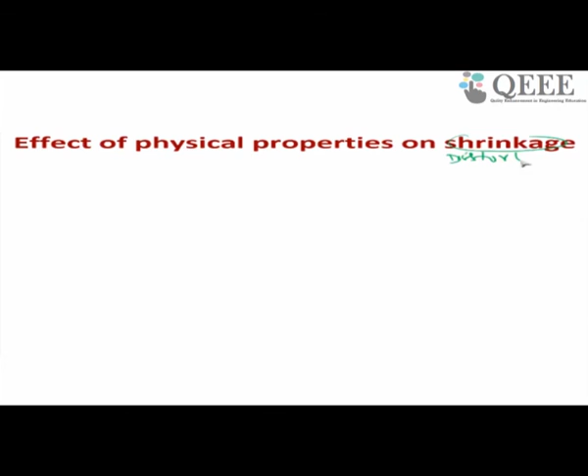So which parameters affect the distortion? This is shrinkage or distortion. The different parameters which affect distortion are: coefficient of thermal expansion, thermal conductivity, yield strength of the material, and Young's modulus.

Suppose you want to join two similar materials, and the coefficient of thermal expansion is very high - what will happen to the distortion? Since the coefficient of thermal expansion is very high, during heating and cooling it will expand or contract in a significant fashion. As a result, you will get very high distortion. So if a material has a high coefficient of thermal expansion, there is a high chance that it will have high distortion.

Similarly, what about thermal conductivity? If two materials to be joined have very high thermal conductivity, what will happen to the distortion level? The heat dissipation will be fast, so it will not retain the heat in the workpiece material. As a result, the distortion level will be low. So if a material has high thermal conductivity, then distortion in that material will be low.

What about yield strength? Distortion or residual stress will occur in the material up to the yield point of the material. So if a material has high yield stress, there is a high chance that a high level of distortion will happen. What about Young's modulus?

So if you take a case study, let us take aluminum to steel. If you want to join aluminum to steel, you have to see whether you will get more fraction of distortion or less fraction of distortion. Accordingly, you have to control your clamping arrangement. So if you take aluminum to steel...

Aluminum, what about thermal conductivity? So we have four parameters. What are the four? Coefficient of thermal expansion, thermal conductivity, yield strength, Young's modulus.

So now let us take aluminum to steel. Aluminum has very high coefficient of thermal expansion, 13.2, and steel has around 6.7. So aluminum has 2 times coefficient of thermal expansion, 2 times CTE.

Aluminum, then what about thermal conductivity? Thermal conductivity of aluminum is again 2 times higher.

So residual stress will be less. So from a residual stress point of view, aluminum will have less residual stress due to thermal conductivity. However, from coefficient of thermal expansion point of view, aluminum will have high distortion. Okay, so what about the yield strength?

Yield strength of aluminum is low and yield strength of steel is high. So since aluminum has low yield strength, it will have low residual stress, so lower fraction of distortion.

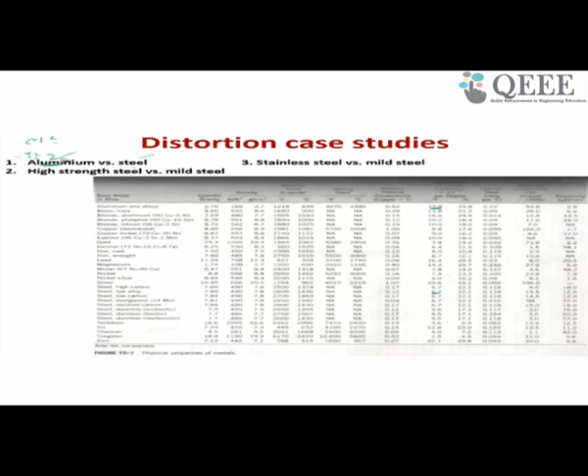Similarly, you can do analysis for other combinations. How to prevent distortion? By doing proper design, joint design, you can prevent distortion. For example, by providing proper joint thickness.

For thick material, distortion will be very high because heat input in this zone will be very high, since more filler metal is required, so more heat input, so it will distort significantly. For thin material, less filler metal is required, so less heat input, so there will be less fraction of distortion.

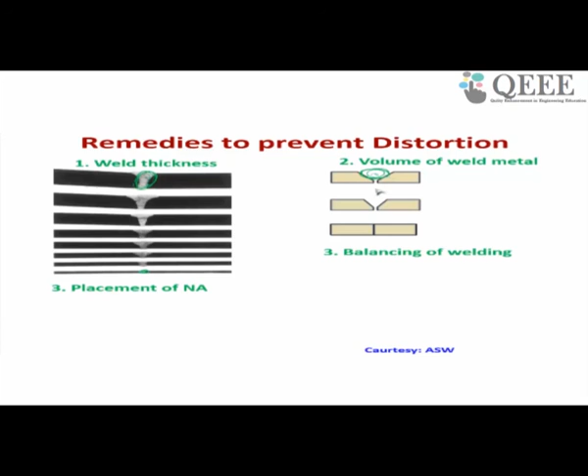Similarly, if volume of material will be more, more volume of material is required to be placed here, so distortion will be more here. Here less amount of volume is required to be joined, so distortion will be less here, you can see. So volume of weld metal also plays a major role in distortion.

Similarly, if you place your neutral axis like this, then you will have more distortion. If you have neutral axis at the center, and the weldment happens at the neutral axis, then you will have less distortion. Similarly, you can also balance.

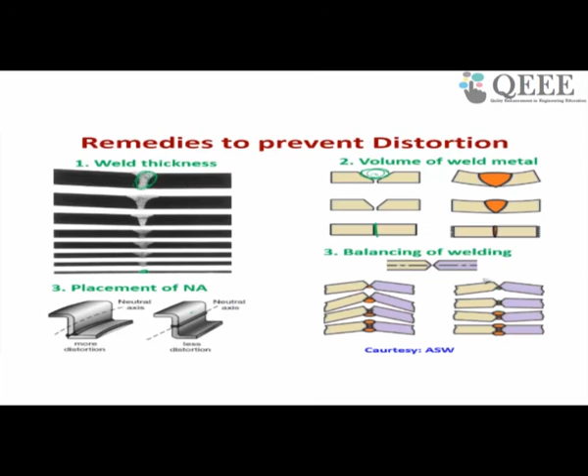Suppose you want to join two pieces like this, then what can you do? If you weld one side initially, then start the second side, you will get high distortion. Instead, if you do one side, then join the second side, then again join the first side, and so on, you can balance the welding. Similarly, if you know distortion will happen like this, you can place your samples before this, then you can remedy and overcome the distortion through position of welding.

Okay, so this is about the distortion, residual stress and distortion.

With this background, now we finished the syllabus. We discussed about liquid state welding processes, solid state welding processes, solid liquid state welding processes, and then defect analysis, weld analysis. Weld analysis we discussed in terms of weld defect analysis and in terms of residual stress and distortion analysis.

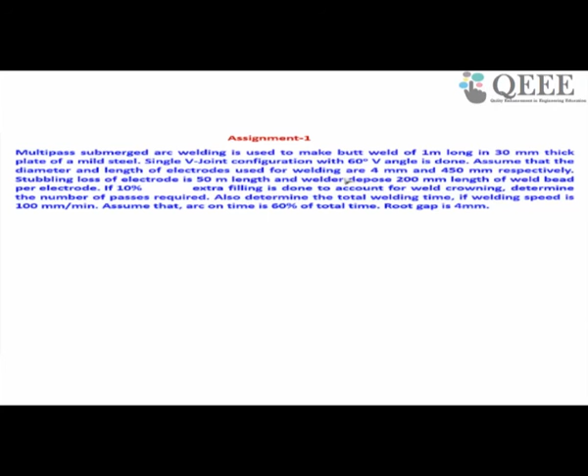On defect analysis we discussed some internal defects like inclusion, porosity, hot cracking and cold cracking, and also some surface defects such as inadequate fusion, inadequate joint penetration, and many more. Then we discussed about the residual stress and distortion. So if anybody has any doubt, I can clarify that doubt.

Anybody want to ask any question? See the screen, I have posted an assignment question. I am going to give this assignment question to you, and that's why I want to have clarification.

If anybody has doubt about the assignment question or whatever we discussed in today's class, you can ask. You can read this question also. If anybody has doubt, you can ask me. Please read this question, I will read it.

Multipass submerged arc welding is used to make a butt weld of 1 meter long in 30 millimeter thick plate of mild steel. Single V joint configuration with 60-degree V angle is to be done. Assume that the diameter and length of electrodes used for welding are 4 millimeter and 450 mm respectively.

Stubbling loss of electrode is 50 mm. Sorry, this is 50 millimeter, please note down, this is not meter, this is 50 millimeter stubbling loss of electrode length, and welder deposits 200 millimeter length of weld bead per electrode.

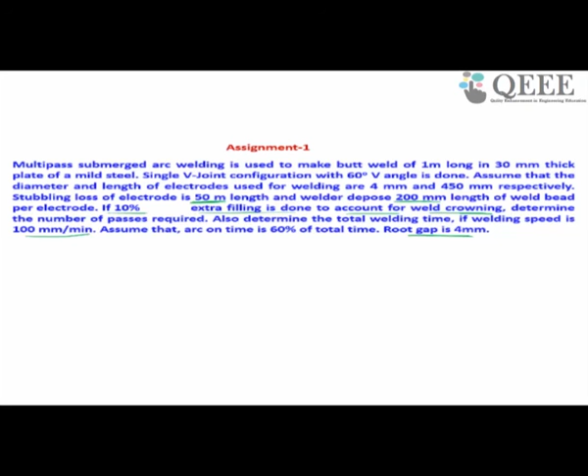So there are many concepts in this question. If anybody has doubt, I will ask you and clarify that doubt. Please read the question. What is stubbling loss?

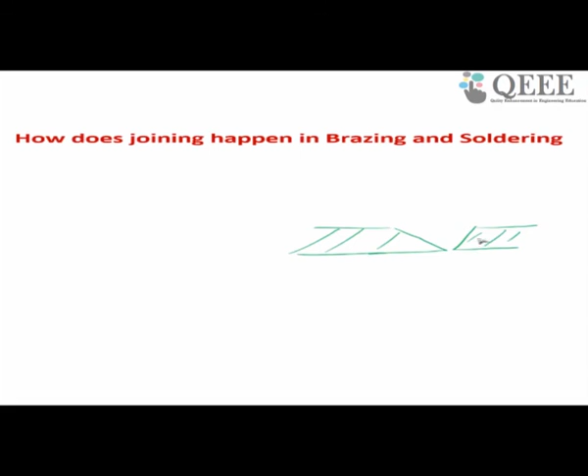Stubbling loss is like when you join together. The question is like you want to make a V joint, so I am asking you to make a V joint. So stubbling loss means you are going to use an electrode, and the electrode is something like this.

Electrode used for welding, 450 mm. If stubbling loss of electrode is 50 mm, this is 50 mm. So electrode length is 450 millimeter. Out of 450 millimeter, only 400 millimeter is being used for welding, and 50 millimeter is lost. That is stubbling loss. It means you will not be able to use the whole 450 millimeter electrode, only 400 millimeter, because 50 millimeter is the loss along the length of the electrode.

That is stubbling loss. Any other doubt? Please read the question and ask me. This question has a lot of concepts. If you can solve this problem, it is a good question. Stubbling loss means in each electrode you are going to use only 400 millimeter, 50 millimeter will be lost.

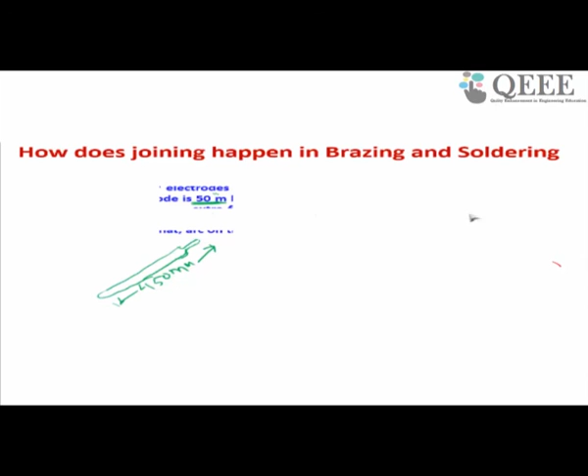So here there are two critical things I am asking. One is stubbling loss. Second one is 10% extra filling done to account for weld crowning. It means during welding I am expecting you have to deposit 10% extra. This is your 10% extra, this is your weld bead, right? So this is your 10% extra crowning.

So this region is 10% extra filling. Whatever volume you have, this will have 10% of that, you have to add that. So geometrically you have to calculate this volume, and then add this 10% onto that. It means total weld volume is 1.10 of the volume of your weld. So how will you join this?

In a single pass you cannot join, right? Each electrode has 400 mm length, and you can use 400 millimeter from each electrode. It is having some diameter, so that volume of material will be deposited in your workpiece material. So it means you need to use a number of electrodes, you have to use a number of passes.

So in a single pass you cannot do it, you need to do multiple passes. You have to join one pass, then second pass, third pass, fourth pass, fifth pass, sixth pass, like this up to getting the total volume. You have to get the number of passes. So I am asking how many passes are required. If you want, you can quickly calculate also.

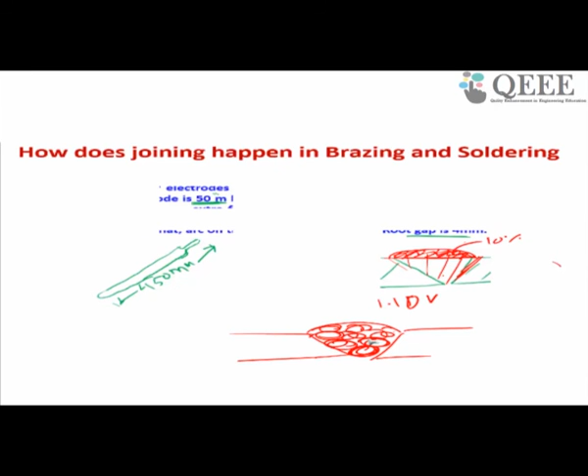Any other query about the question? I am going to give this question as an assignment. Any other query about the question? Okay, so anybody want to ask?